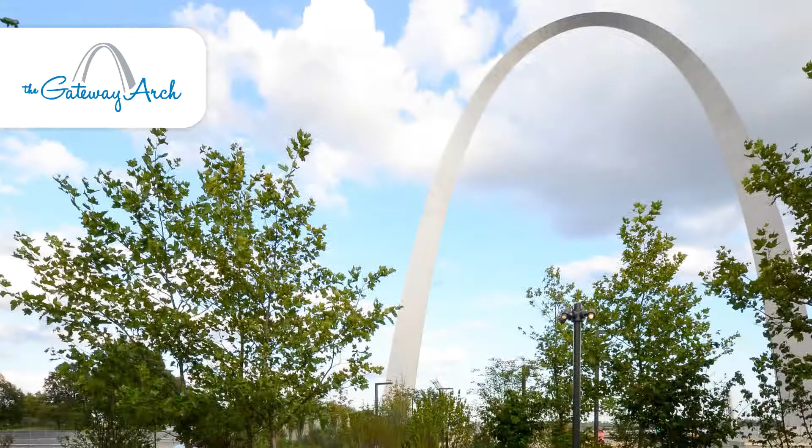Organic Lock is the strongest organic binder on the market today. Designed for stabilizing aggregate surfaces, its functionality allows you to create natural, aesthetically pleasing, permeable surfaces that hold up to extreme conditions. This video will walk you through the steps on how to properly install the Organic Lock pre-blended aggregate material on your job site.

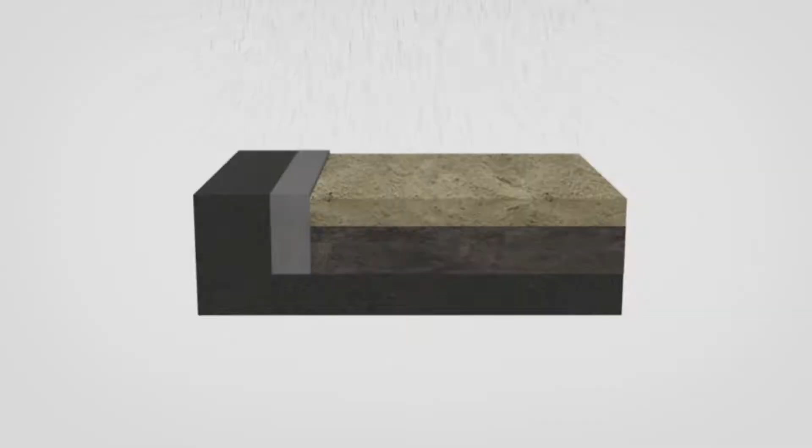Organic Lock is a powdered binder made from a renewable plant resource. It's designed to be blended with crushed aggregate to create natural-looking pathways and surfaces. The binder locks the aggregate in place to minimize erosion and minimize project site maintenance. As the water permeates the aggregate, it gets absorbed by the Organic Lock binder and creates a gel that coats the aggregate particles. The gel expands in size and holds the aggregate particles together, which significantly reduces erosion.

When getting the pre-blended Organic Lock aggregate delivered by a licensed Organic Lock dealer, you'll need to pay attention to moisture content and optimal site preparation before the installation process can begin. Adding the optimal amount of moisture to pre-blended Organic Lock aggregate activates the powder into a gel that forms between the particles. The delivered aggregate will always have a beginning moisture content that may need to be optimized.

To achieve the optimal water content, it's important to have an understanding of your starting moisture percentage. An appropriate ending moisture content will be between 8 to 10%, but this optimal state is best established with a field test. The best thing you can do is to figure out the exact water to add on the first batch, then simply replicate it for each subsequent batch.

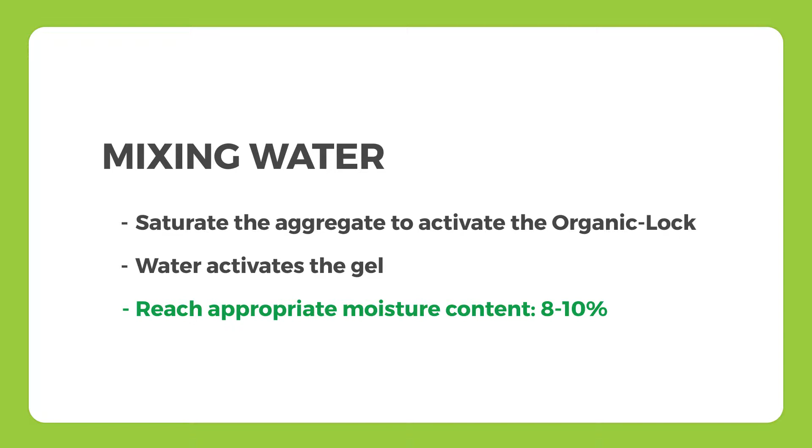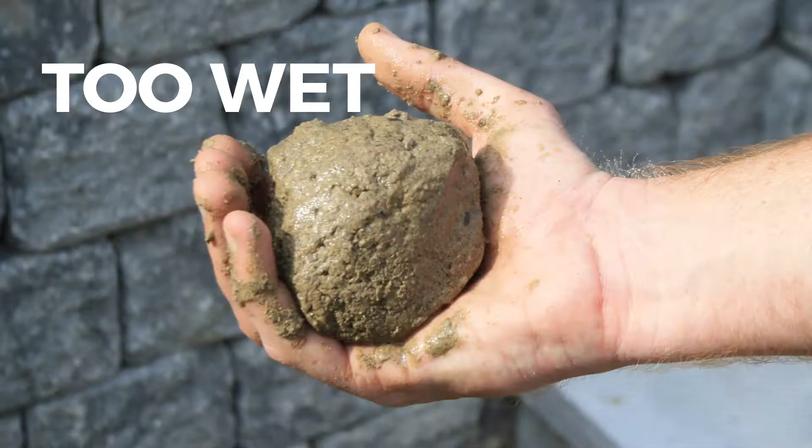The ideal way to establish proper water content in the mixed product is with a snowball test. The snowball test is the act of picking up the blended aggregate and using both hands to firm and form a snowball. Start your first batch by adding small metered increments of water until you achieve a successful snowball. If the ball is too dry, it's going to crumble. If it's too wet, you'll see a moisture glaze or sheen, which is telling you there's too much water. What you're looking for is that spot just after it crumbles, but before the moisture creates a sheen-type texture.

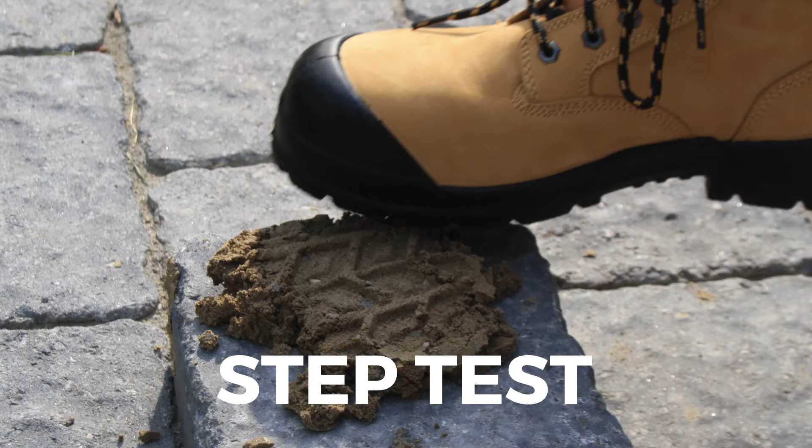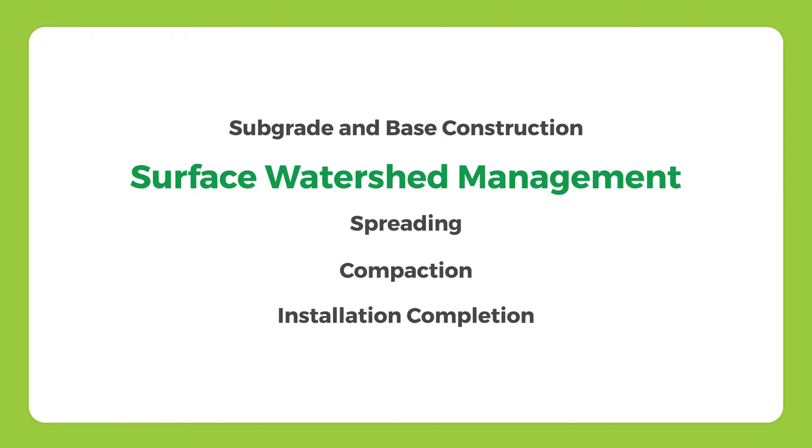Now that you've got a proper aggregate homogeneously blended with the proper amount of Organic Lock and water, your product is ready for installation. The key elements for a successful installation are subgrade and base construction, surface watershed management, spreading and compaction, and finishing on the final spray for the completion of the installation.

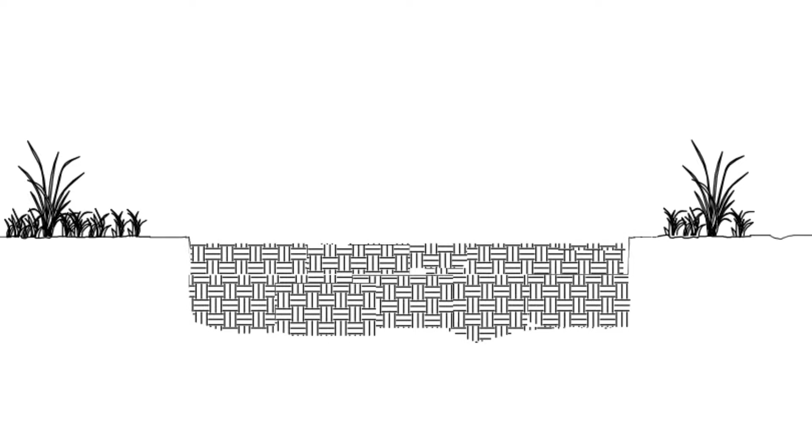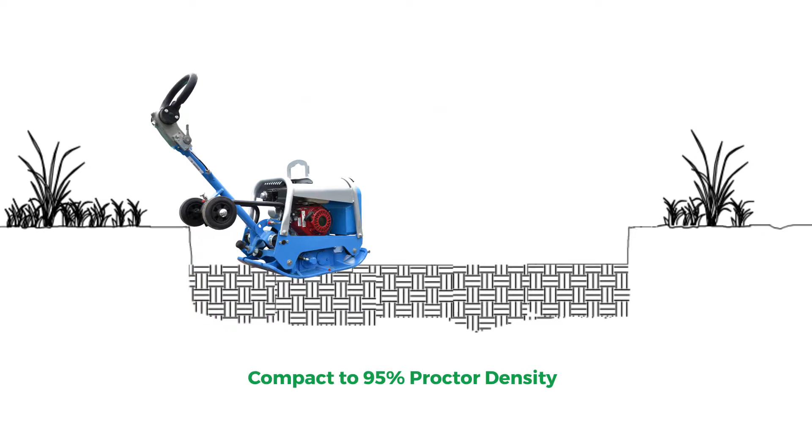The first step of installation is to excavate and properly prepare the subgrade to be ready for the installation. Excavate the proposed area to a depth related to your installation goals, which will allow for the proper depth of base aggregate followed by the Organic Lock blended aggregate. Before adding your base aggregate, you'll need to compact the subgrade to a 95% modified Proctor density using a compactor.

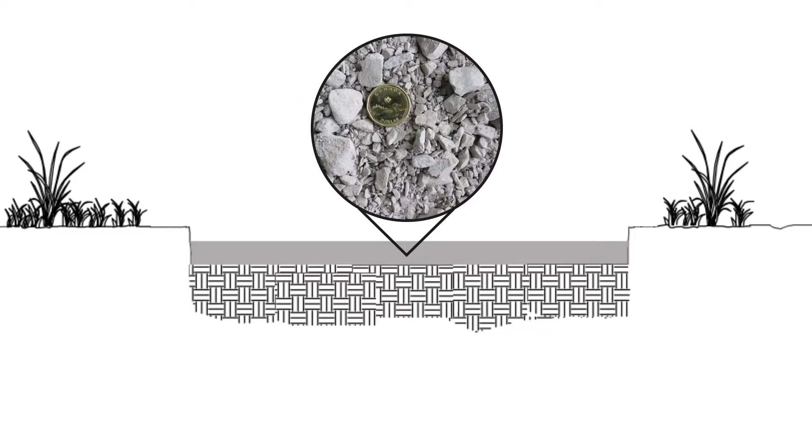Once your subbase is compacted, you will install your base layer at the depth level required for your particular traffic type, as found in the related specifications. The base material type is listed in the specifications as your region's DOT recommended crushed granular road base. An example of this would be 3/4 crusher run or granular A material, with the most important aspect being the inclusion of fines in the aggregate material.

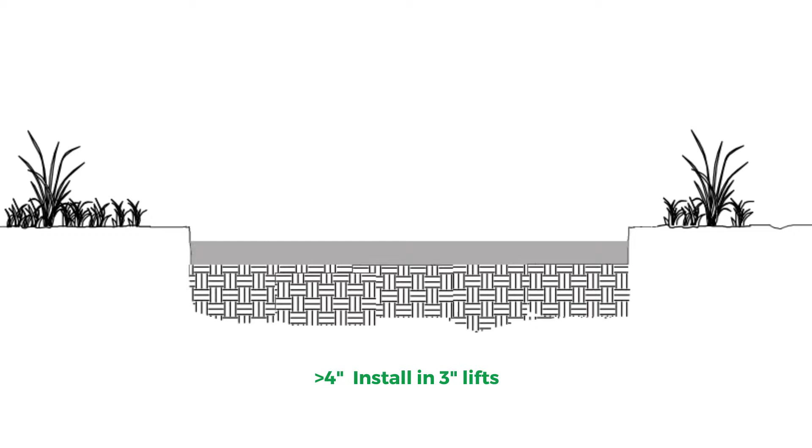In situations where the base layer calls for greater than 4 inches, you need to install the base in 3-inch lifts. Be sure to apply a fine water spray in between lifts to create cohesion while optimizing the compaction. Compaction should be done with a vibratory compactor or minimum 1-ton roller and needs to achieve the 95% Proctor density.

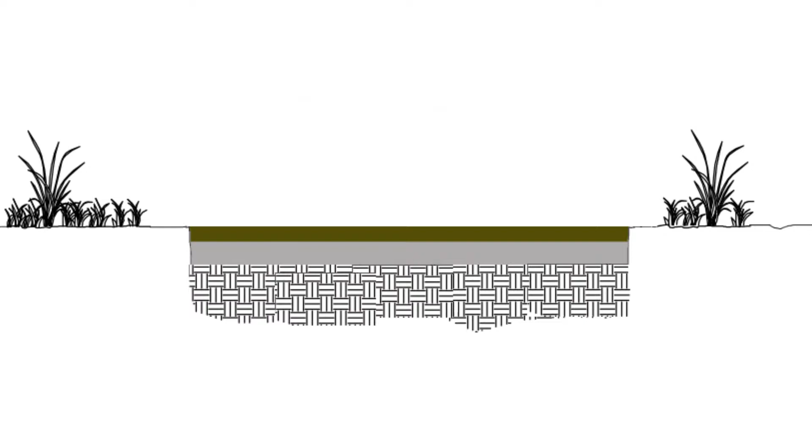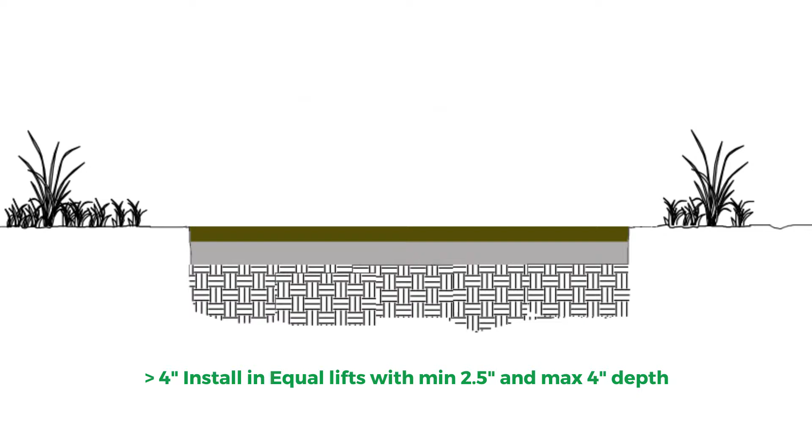With a successfully installed base in place, you can now install the Organic Lock blended aggregate to the depth required in your specifications related to the expected traffic type. If you're installing up to 4 inches deep, you can install in 1 lift. If you're installing greater than 4 inches, you should do this in equal lifts with a minimum of 2.5 inches and a maximum of 4 inches per lift and a light soaking in between.

It's always important to understand the effects of Mother Nature surrounding a project. Things like topography, ground cover, and canopy cover can have significant impacts on water flow over your projected surface.

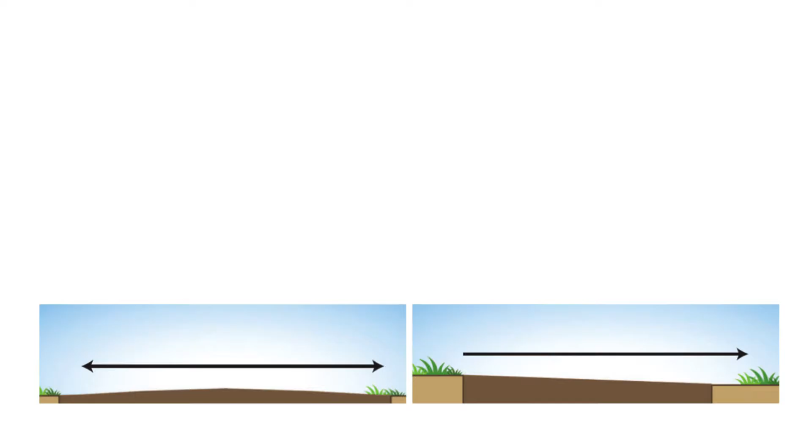It's important to guide the water flow where needed and avoid low areas, as sitting water on a pathway system is never ideal. Proper watershed management is best achieved by installing a crown or cross slope to divert rainfall runoff to flow off the side of the surface.

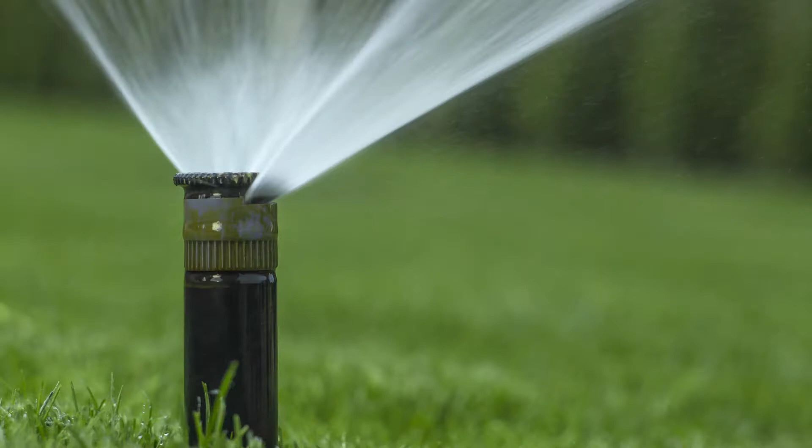An important note is to be aware of any man-made water sources that may have an effect on the area. Things like sprinkler heads that are facing your surface can have detrimental effects with long-term pooling. It's heavily advised to adjust this flow away from the product surface.

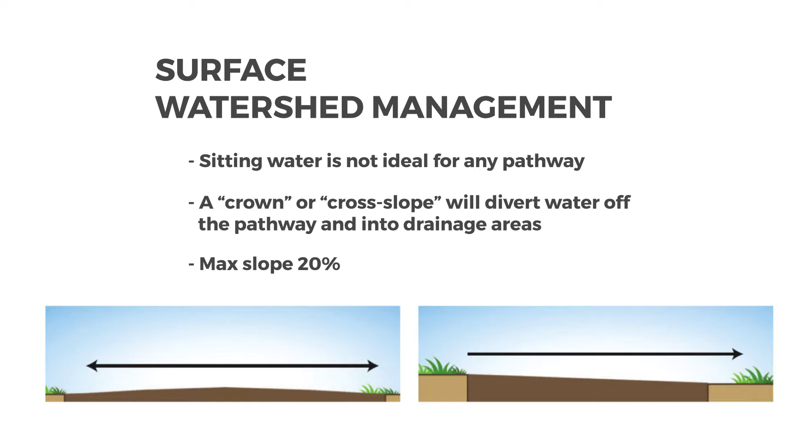The maximum slope that is acceptable for an Organic-Lock blended aggregate application is 20%. For slopes that are 10% or greater, we recommend installing runoff diverters, which are materials such as railroad ties, metal troughs or equivalent, embedded in the pathway at a 45-degree angle to prevent water gaining momentum, which can accelerate washout damage.

To determine how much product you'll need for your project, you can use the product calculator on the organiclock.com website under the Resources tab. If you know your square footage and traffic type, just go to the Resources section and drop down to Product Calculator. Select your traffic and enter your square footage to establish your product quantities.

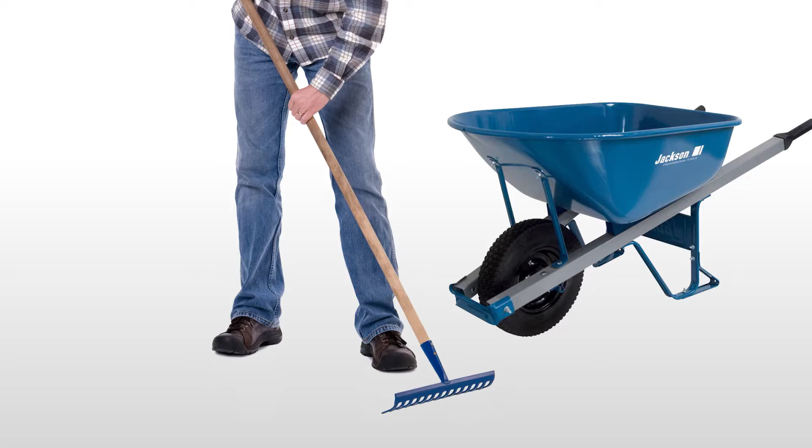In order to get the proper compacted depth, understand that the aggregate will typically compact 20 to 25%, depending on the aggregate type, gradation, and the moisture content. For smaller projects or tight spaces, it's possible to use a rake and wheelbarrow to spread the aggregate. However, extra precaution should be taken to ensure depth consistency over the entire project, as man-made installations can be prone to error. On larger projects, it's ideal to spread the material using a consistent mechanical means.

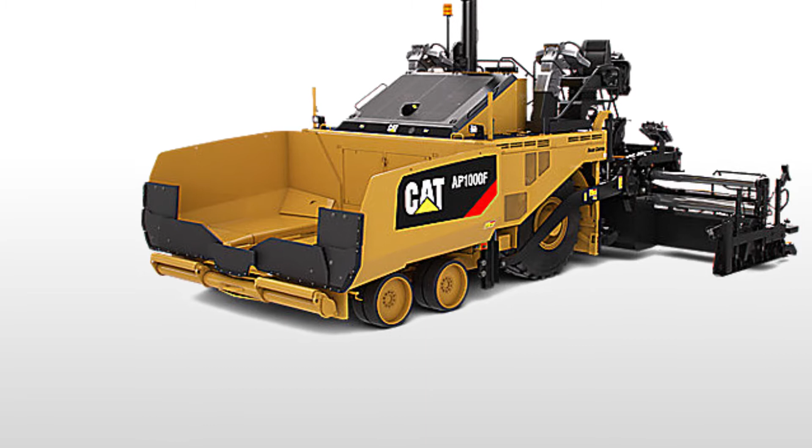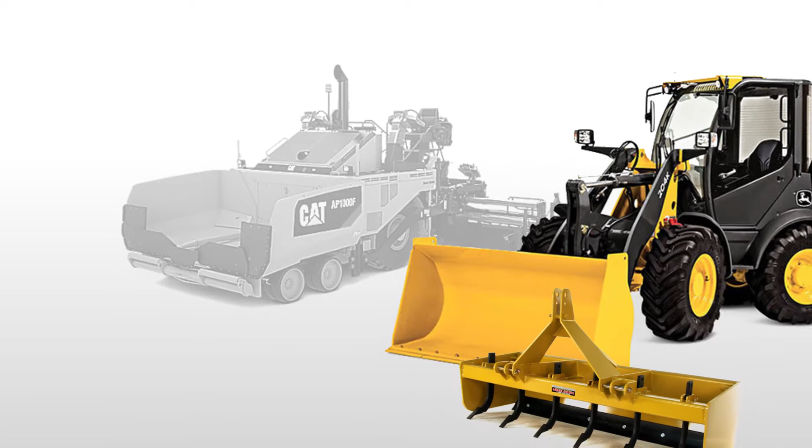Although using a paving machine is going to provide the most consistent results, this may not always be available. Where this is the case, back-dragging the blended aggregate can be done with a front-end loader or a box grader attachment. Since the material is being pulled behind machinery, there can be compaction issues as the tires drive over the material. This is something to carefully consider and minimize where possible.

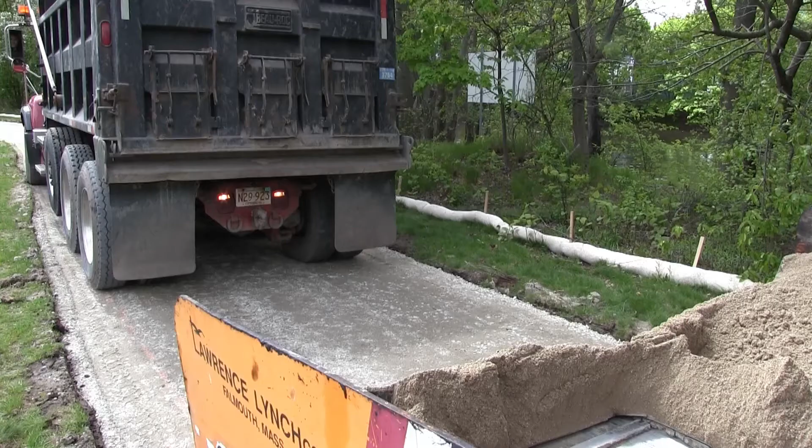Although there are multiple ways to spread the blended aggregate, for larger projects, the use of a paving machine, such as an asphalt spreader, is definitely ideal for consistency and efficiency. Using an asphalt spreader allows you to have the pre-mixed and pre-hydrated material delivered in a truck directly to the spreader. The material is dumped into the spreader, where it is then dispersed at a set height on the prepared base.

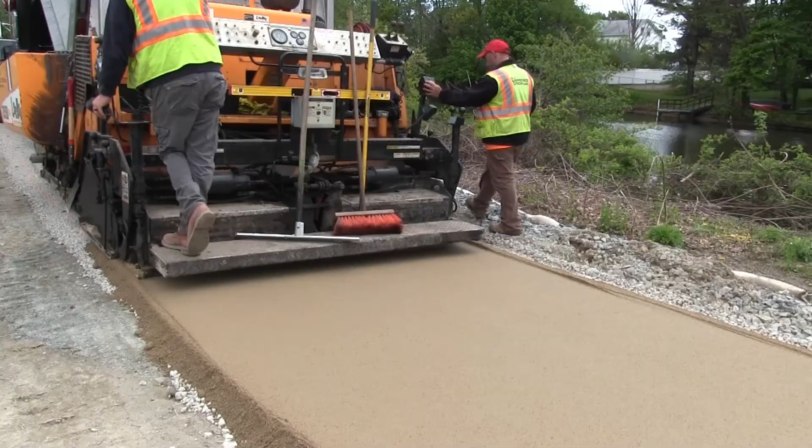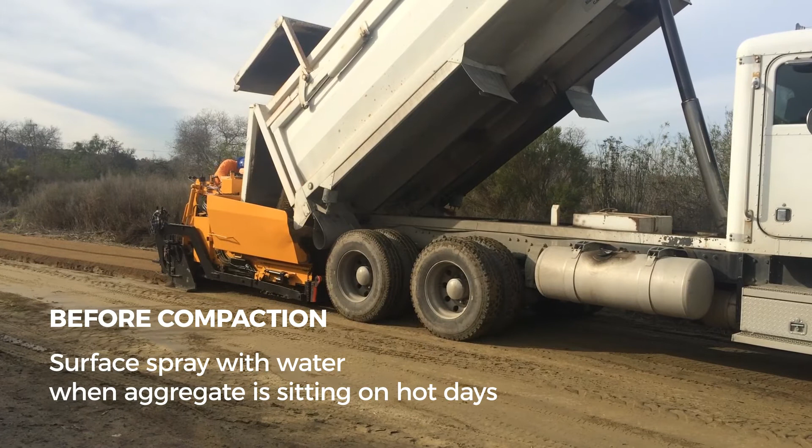The asphalt spreader provides some additional compaction on the material, while it moves along dispersing a consistent depth of product. For larger projects, you can arrange larger trucks to continually feed the spreader as it moves down the installation. Because the water is already mixed into the aggregate, it's immediately ready for compaction after spreading has occurred. However, if during spreading, the moisture levels of the aggregate drop because of ambient temperatures, examples being hot, dry days, it is advised to lightly spray the surface to increase the hydration to optimal levels before compaction.

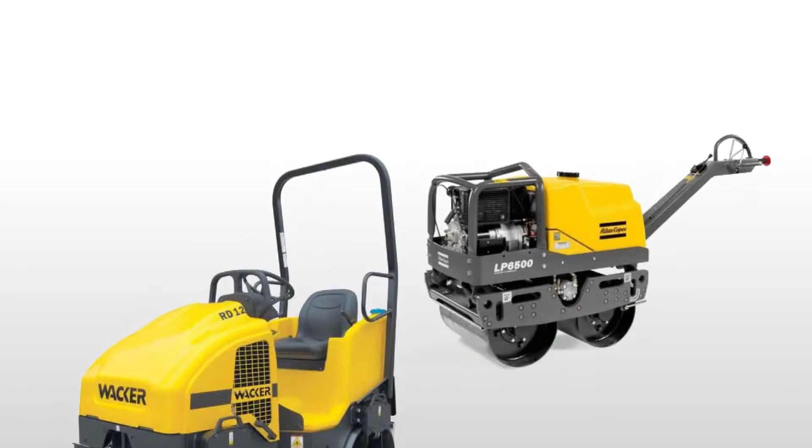Compaction is done with a minimum 1-ton roller. This should be a static compaction, not a vibratory one, as the vibration can disassociate the bond. If during compaction you're finding significant ruts, the material is moving around like jello, or perhaps it's sticking to the roller as it moves, these are signs of too much moisture. In this case, you should simply allow time for some of the water to evaporate out of the mixture.

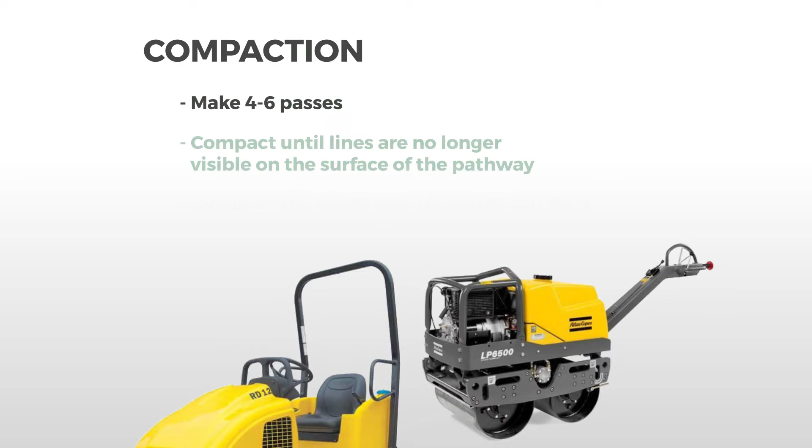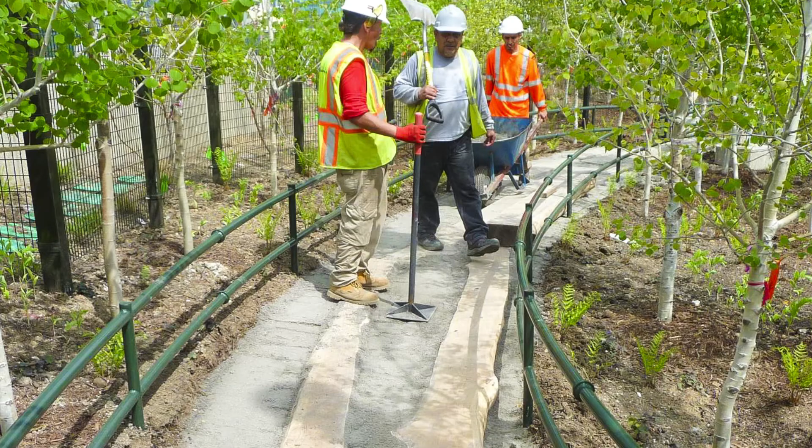If it doesn't have enough moisture, you'll be seeing lines and cracks consistently. To fix this, you can provide an even and light spraying of water over the areas of issue. Make 4 to 6 passes with the roller until you no longer see any lines on the surface. Pay close attention to the installation specifications to make sure you compact in lifts for any installation above 4 inches in depth. Hard-to-reach areas should be compacted using a hand tamper or equivalent.

To complete the installation, you'll want to do your final soaking. The purpose for this is to make sure that any of the top layer material that wasn't properly hydrated gets a top-down soaking to make sure it's activated and can settle into the rest of the mixture.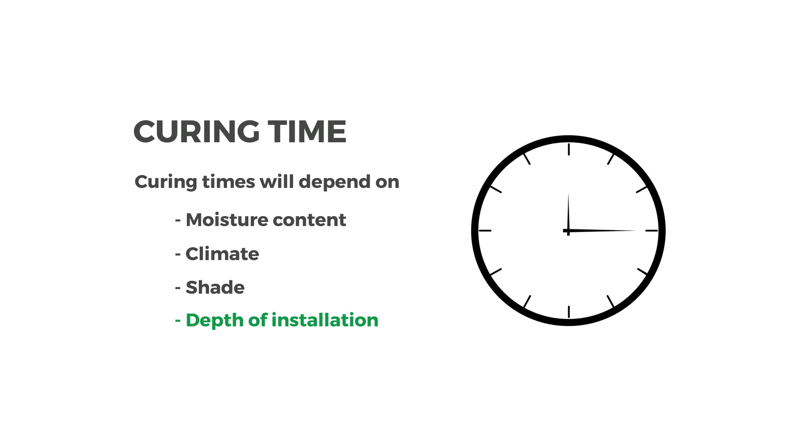Last comes the curing time, or in better terms, the time before first use. The actual time depends on moisture content of the aggregate, climate, canopy cover, and the depth of the installed material. However, we generally say that 24 to 72 hours is the standard, but the longer is always the better. To establish timing for first use, simply walk on the material and feel if it's firm enough to allow traffic. If the material is dry on the surface but still feels a bit spongy below, then it is a good idea to leave it to cure another day.